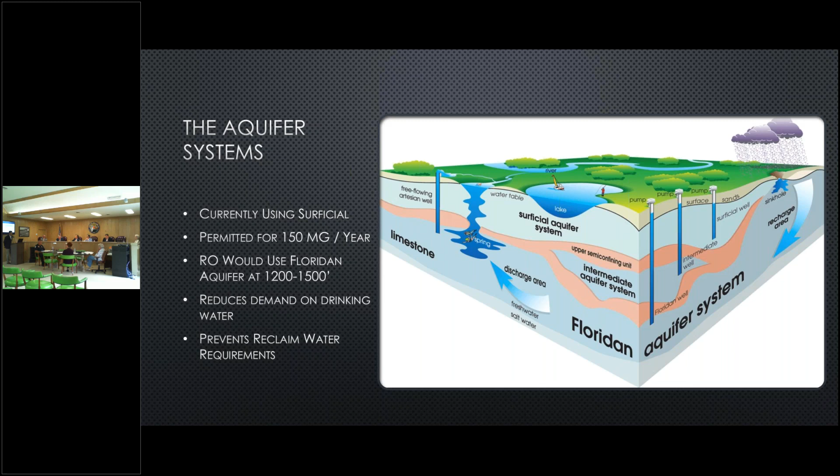Ultimately, one of the other things we're trying to accomplish is reducing demand, but also preventing being forced to use reclaimed water. We're getting pressure from the city of Delray as well as the town of Boynton Beach for adopting reclaimed water for use, and South Florida Water Management District is very much in support of seeing high volume water users like golf courses find alternative sources.

And one of the most popular is reclaimed water, but being that we're on a barrier island, for me personally, and I think for the club as well, the last thing we want to do is take reclaimed water, introduce it onto the property, and have it run off into the ocean or intercoastal, given the sensitivity of our location.

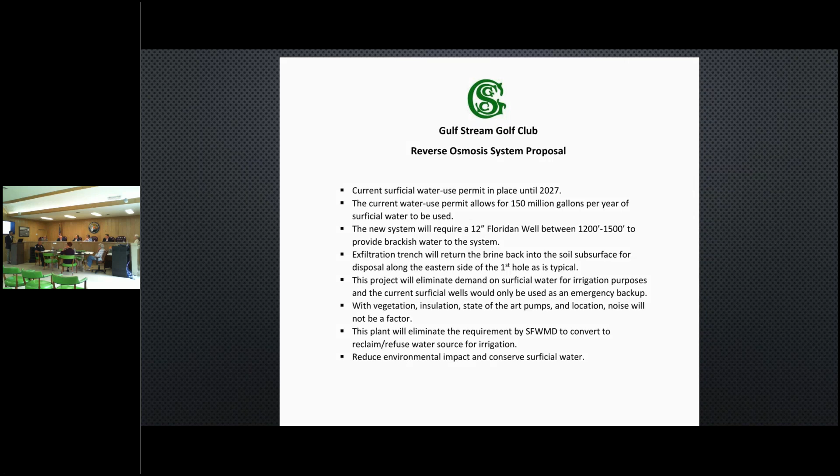A couple things I probably don't need to bore you with, but the Floridan well, the 12-inch well, as I mentioned, 1,200 to 1,500 feet. We have been permitted by South Florida Water Management District to drill this well and convert to this water for quite some time. Behind me is a spec of the well.

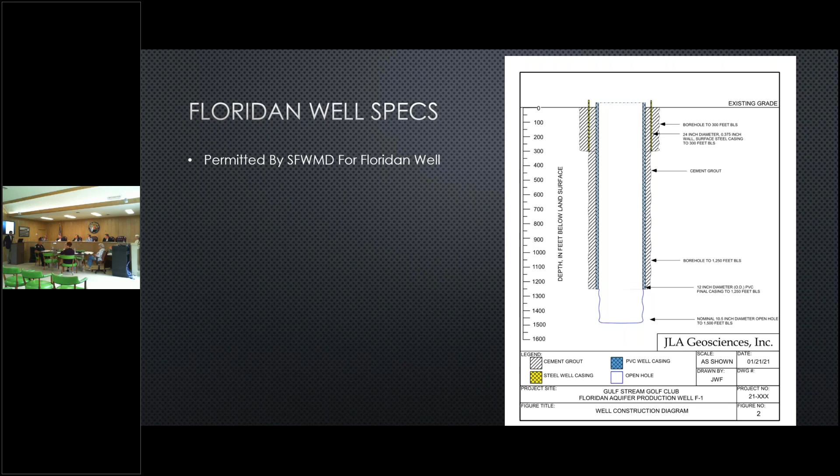Again, very boring, but we're one of the last golf courses this close in proximity to the ocean that is not on reverse osmosis water. Most of our clubs that are, I'll say competitors, but clubs of like nature, like Seminole, Lost Tree, the Everglades Club, Palm Beach Country Club, all of these clubs are using reverse osmosis water. As mentioned, finding an alternative water source will be a requirement into the future with South Florida Water Management District.

We are permitted until 2027 for our surficial well use, so we're not up against the wall, let's say, to make the conversion, but we want to be proactive and do the right thing and try to get out in front of this, and that's why we're here today, asking for this permission.

With the area selected, we'll have plenty of dense vegetation that's existing. A lot of this vegetation is over 75 feet tall and extremely mature, and the new structure where any noise would be coming from will be eclipsed by existing structures along with dense vegetation.

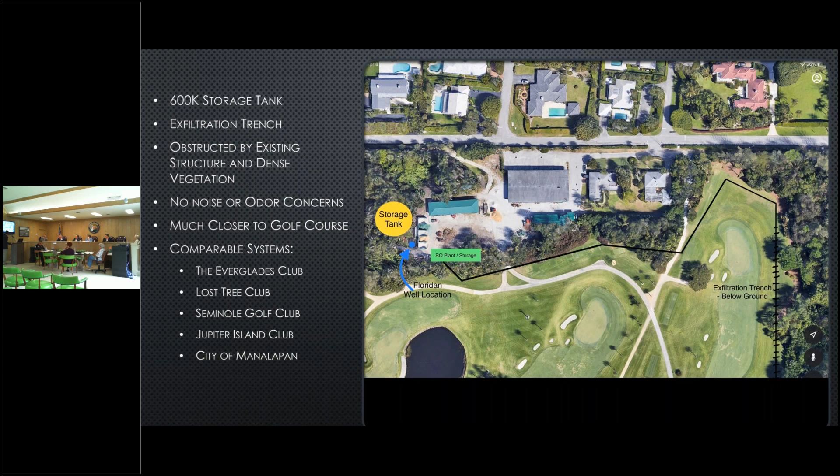These are some examples I showed at our last presentation, but some of the clubs I mentioned, the Lost Tree Golf Club, their RO plant system is only 272 feet from high-end residential housing.

This is for their concentrate, or how they dispose of theirs. We're going to be essentially sending ours through the exfiltration trench, which is a completely below-ground process.

We talked last time about noise and smell. I think those are the two biggest questions when it comes to this process. And this plant is—

25 years old, and as we said, we toured this plant. I don't think we had any smell the day we were there. And noise was not an issue. The plant is definitely noisy inside, but you go outside and there's little to no noise escaping the building. And it's much closer than the plant we would be looking to install.

Two things important to point out: this plant is 25 years old, and there's been lots of technological advancements. Last we spoke, our engineer Glenn Miller, who's here today, designed this plant 25 years ago, but they have things like a turbo you put on that makes the pumps even quieter today than they were 25 years ago. And the fact that we're injecting the waste or disposal back into the ground, it never really sees the surface, which I think also eliminates any more concerns about odor.

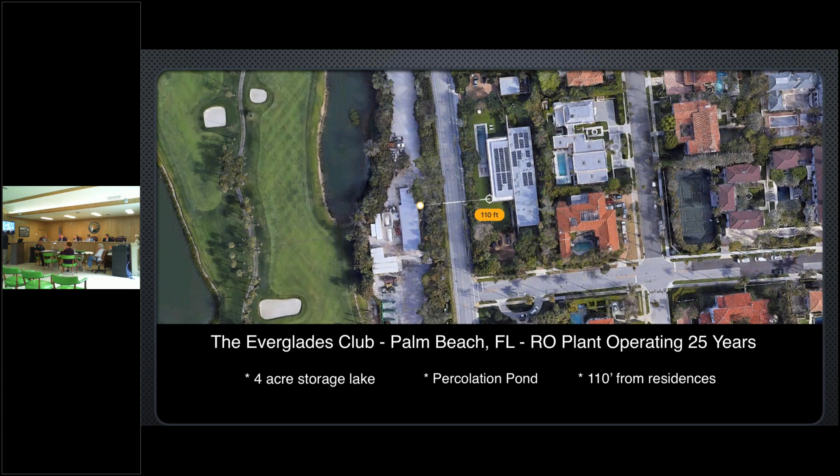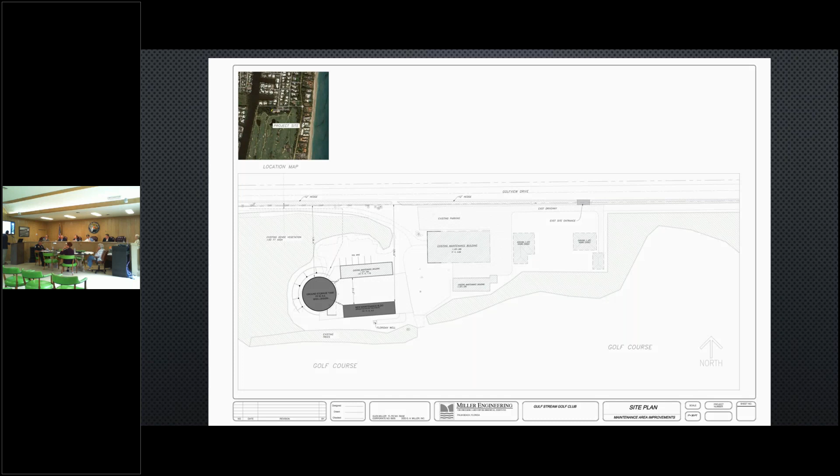Brian, can you go back? I wanted to bring up the gate. Sure, in this location. Can you just point that out?

I can. So I emailed Mr. Dunham and Mr. Nazzaro, as well as the chief. We had a meeting requesting an updated construction entrance. One of the issues we have with our drive is making this corner with any large vehicles. We just have hedges here, and this is a mahoe tree or sea hibiscus. We were able to cut some limbs off the side of this tree and leave the tree intact, removing a few hedges.

In our meeting the other day, everyone was fairly comfortable seeing that we could utilize this area to back down and pull straight in. Same thing if we come out with the truck - we can back down and leave straight out, versus trying to make this corner around the building.

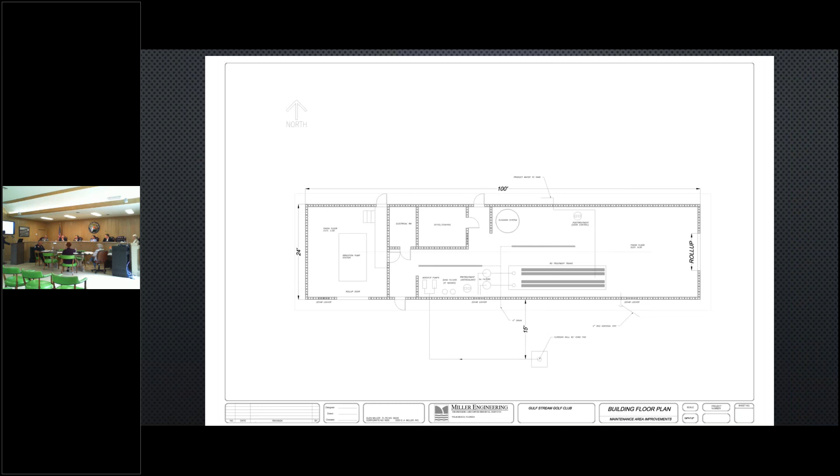Any other questions? Are you finished with your presentation? I'm sure you've heard enough from me. I've got a couple more slides, which have all the information, and a couple elevations of the building, again matching what's existing today. Thank you for your time. That's all I have, if there are no more questions. Very good, any other comments?

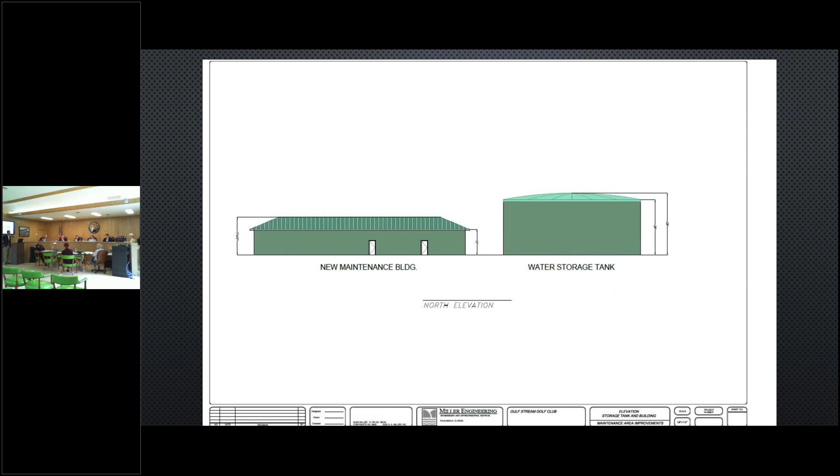Our first item of business is ordinance number 21/4. Any discussion on it? It's been read once, correct?

Quickly, Mayor, I'd just like to note that the approvals are contingent on the club and the town entering into a developers agreement, which is part of the record. Paragraph 2, E and F were modified slightly from the last time this was on reading, to include an enforcement mechanism. Those paragraphs relate to the special exception requirements relative to odor and noise complaints, and the engineer implementing a plan that the club would have to follow within 30 days. If they fail to do that, they would need to cease operations until they met those requirements. So I just wanted to put that in the record - these approvals are contingent on that, and it has been modified slightly from the last time we saw it.

Does this have to be read first again, or? No, sir, it just relates to the developer's agreement, the ordinance. So we're all set. Very good.

Ms. Taylor, would you read the ordinance, please? An ordinance of the Town Commission, the Town of Gulfstream, Palm Beach County, Florida, amending the Town Code of Ordinances at Chapter 66, Zoning, Article 6, District Regulations, Division 4, OR Outdoor Recreational District, Section 66-254, Special Exceptions, to provide for a special exception for reverse osmosis water plants associated with a golf course, providing for severability, providing for repeal of ordinances in conflict, providing for codification, and providing an effective date. It was passed on first reading on May 14th, 2021, and is now up for the final reading on this 9th day of July, 2021.

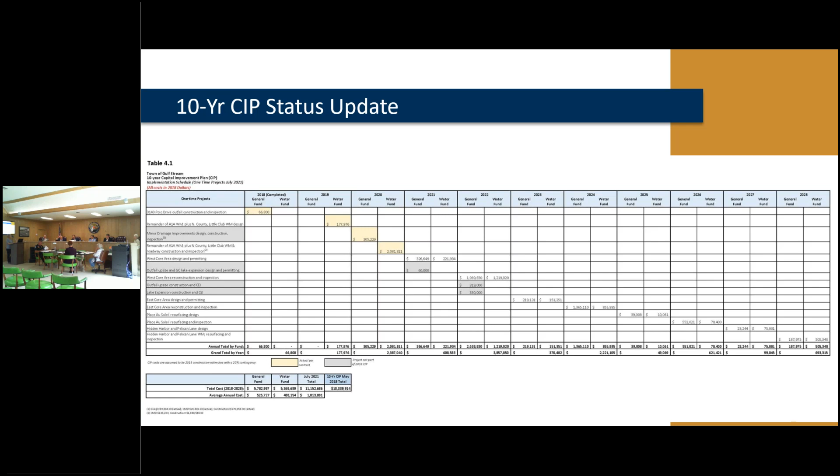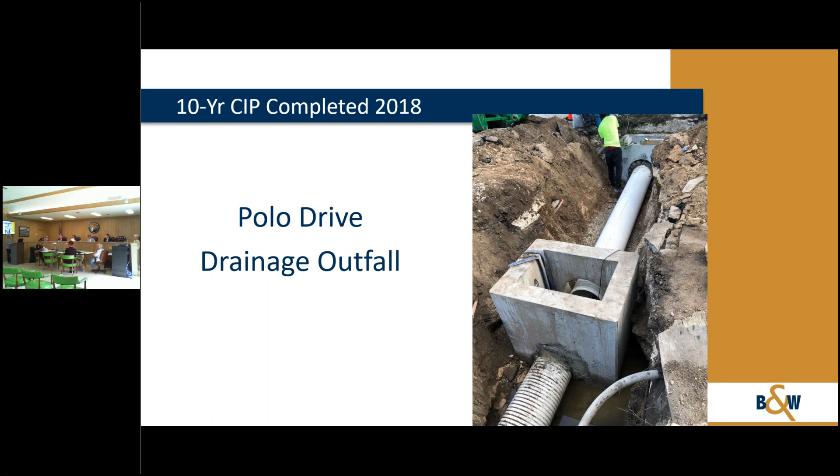So to date, in 2018 we completed the Polo Drive drainage outfall design and construction. In 2020, as you know, we did the design in 2019 and constructed the A1A water main from Golfview to Sea Road, which included the extension along North County and along Little Club Road, all part of the CIP plan.

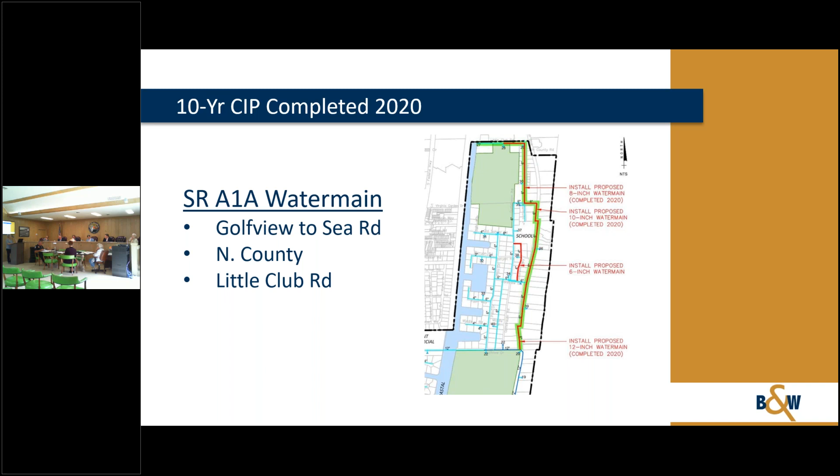Also, last year we completed some minor drainage improvements, primarily providing some swales, some aprons to get the water off the roads into the drainage inlet, and then we did some widening along Polo, Gulfstream, Banyan, and Lakeview.

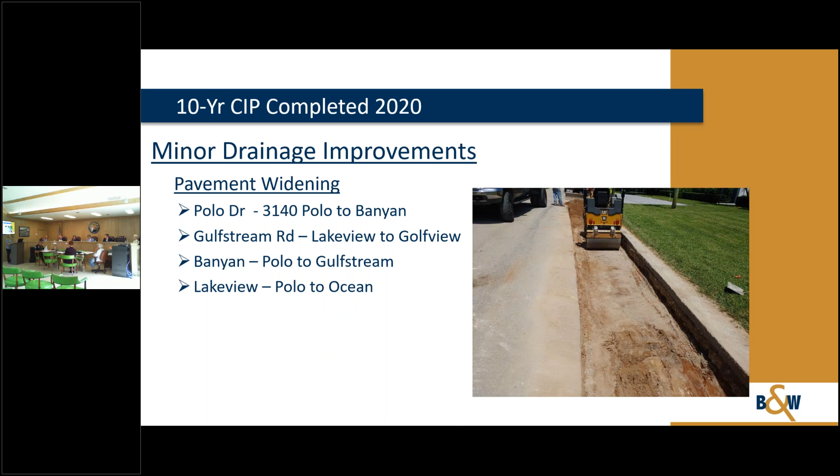So that's the recommendation. This was not included in the CIP, so this would be an additional project to the CIP, as was the prior minor drainage improvements project. So with this drainage issue coming to the forefront, we recommend that these improvements be done now, and that the design get started on that.

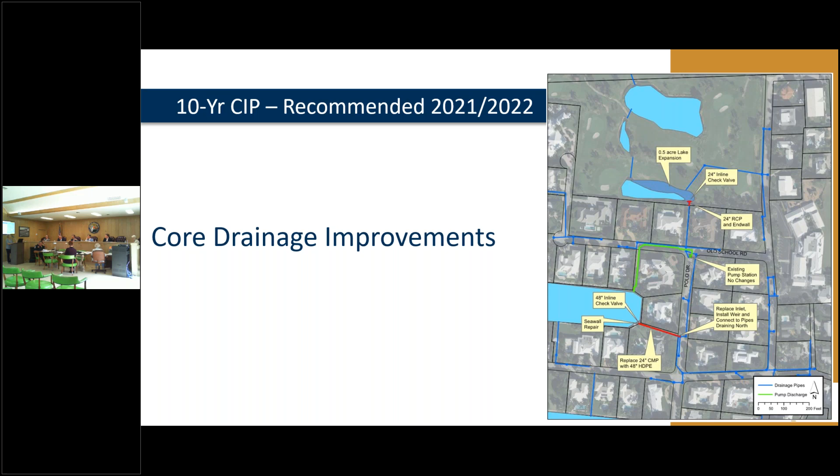But we also want to talk about modification to the split of the work in the core. The master plan had a north core improvement and a south core improvement, basically the split being along Banyan. With this recommended drainage improvement being on the west side of the core, we're now looking to recommend the split of the core work be a west core in 21, 22, and an east core work being done in 23, 24 timeframe.

And the east core, let me back up. So the west core, we already did all the widening that was recommended for the west core with the minor drainage improvement project. So now we're talking east core. We've got some widening on the east core, which was recommended in the master plan: Sea Road, Gulfstream, Lakeview to Golfview, Bermuda, Oleander, and Middle Road, Polo to Gulfstream.

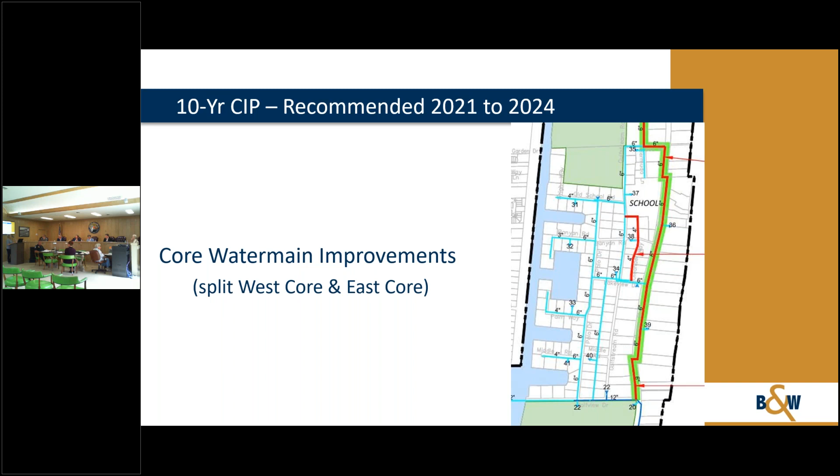It certainly makes sense, particularly since the road expansion has already been, at least temporarily, accomplished. There will not be the issue of the road expanding into existing landscaping any more than it already has. So that's great.

Can I ask a question? This is just funny, but do you take out the old water lines? I mean, do you take those out of the ground?

Realistically, it'd be better to take it out. Realistically, yes, but financially it won't be a wonderful thing for us, because it's expensive to get rid of the stuff. It has to be packaged in a certain way and then transported. I understand, it's very expensive.

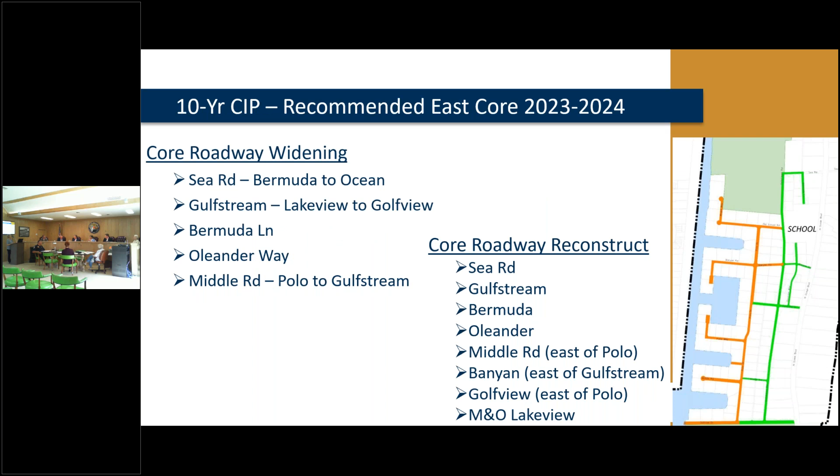So really, you had asked the question, where do we go from here? Again, as she said, our goal is to get your direction in terms of the scope of work that we need to assign to them now, which is what she has just outlined for you. And if the town commission is good with that scope of work, then we'll have to negotiate an agreement with Baxter Woodman, which we would have on our August meeting to do planning and design and all that.

I just want to circle back, sorry to keep going back to it, but I want to flesh out my understanding. The west side, primarily the Polo Drive, the road width is now established, but with the improvements to be made, will we be increasing or expanding the swales on the east-west side? I'm trying to think of what impact on the residents along this road will be.

The intent would be—and we can have Jeff jump in here if he needs to—the preference is to use swales just because it's less expensive. But in some cases, if we have an outfall like the Polo outfall we just talked about, or the one you mentioned that will be new between Banyan and Old School, if we can easily add pipe extension and additional inlets to bring more water to those outfalls, we'll do that. So it's kind of like, what options do we have available to us? Can we connect it directly to an outfall pipe, or is the best we can do a swale?

Now, just like we did with the minor drainage improvements project, there were cases where we had on our plan to put a swale here, but we got out there and there was too much that would be impacted, so we shifted the road widening—1 foot on either side, we shifted it 2 feet on the north side, or whatever.

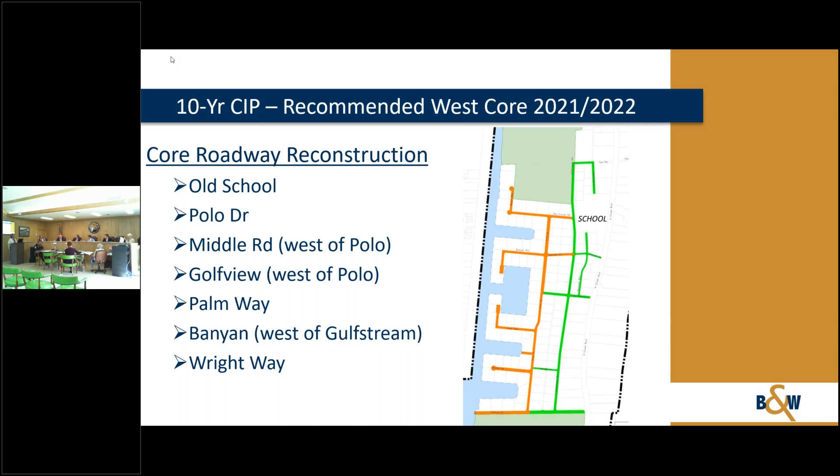But just to summarize, Paul and Rebecca and Greg are trying to sit down and review the numbers and come back next month with an evaluation of that. Overall, as a consensus, we would agree to have this project go over a season. I'm okay with that.

Okay, so we'll be able to do that in a month, can't we, to come back with this idea of doing it all in one time? Sure. Okay, thank you very much, Rebecca. Thank you, appreciate it. Sorry to ask so many questions and take so long. Yeah, but that's why we're here.

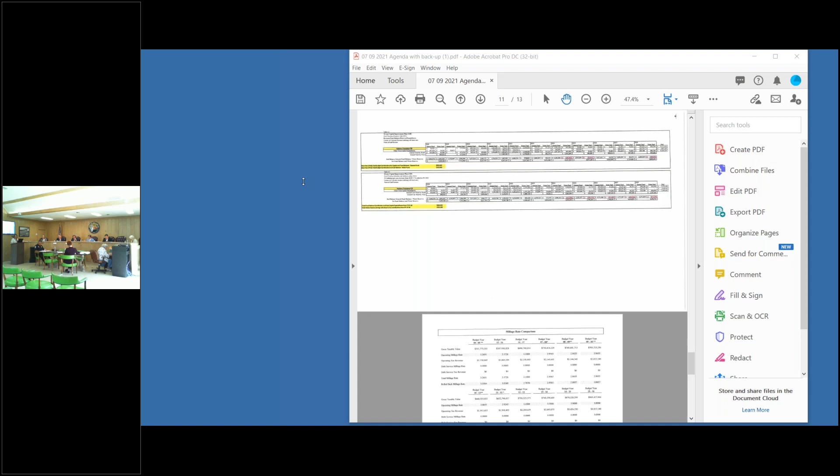So those are the items, and then we have money in there for supplies and equipment that might be needed back in the workshop. Also, as we touched on for a minute, staff is recommending a 4% COLA increase in salaries.

What are we basing that on? We try to refer to this every year, but this year is kind of unusual. The U.S. Department of Labor, Bureau of Labor Statistics, Consumer Price Index for all urban consumers increased over the last 12 months at a 5% rate. You can break that down into the various items included. For instance, energy over the last 12 months has risen 28.5%.

Used cars and trucks rose 7.3% just in May, and 10% in April. The index for food away from home rose 4% over the last year. Full service meals rose 4.1% over the last 12 months.

There are other indexes too, for medical and so on. My point is the indexes they're using — this one, over the last 12 months, the all-item index increased 5%, and that was the largest 12-month increase since a 5.4% increase for the period ending August 2008.

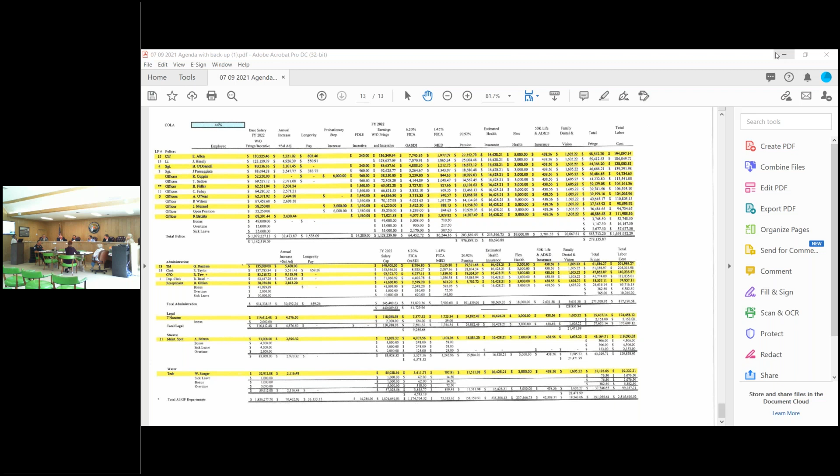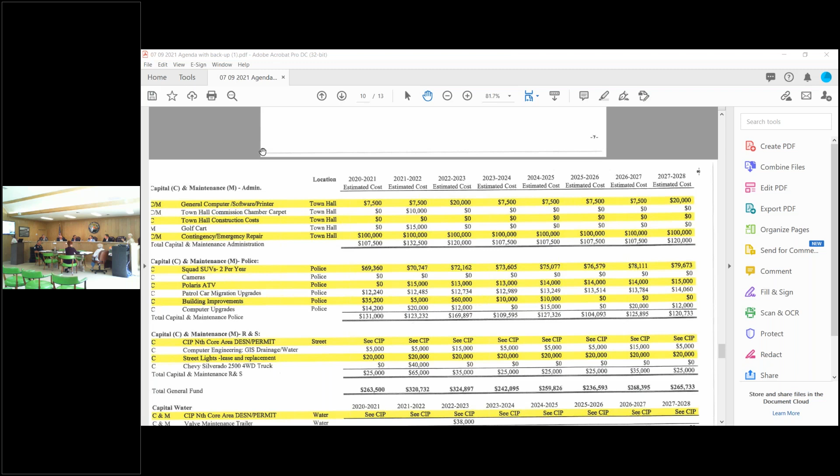We looked at the sources to try to find the financial impact of inflation, so it wasn't just pulled out of thin air. For the Miami, Fort Lauderdale, West Palm area, the CPI is 4.1.

Okay, that's what I wanted, thank you. Any other questions? No. Our total budget this year is $11,104,053. That compares to last year, which was $7,597,000. 2020 was $9,707,000. It all depends on CPI, our budgets are all CPI driven.

I did have a couple pages I wanted Rebecca to explain the numbers. I promise it's just 2 or 3 of them. Rebecca, if you can turn to page 3, the general revenues, could you just explain the operating transfer number? So the operating transfer is just where we're drawing down on fund balance.

In the revenue section, operating transfer means we're pulling money out of fund balance to supplement our revenues this year to be able to afford our expenditures. And if you look at the expenses, there's an operating transfer where we're taking money from the general fund balance and transferring it to the water fund to help pay for those water lines. Those are pretty standard government accounting things.